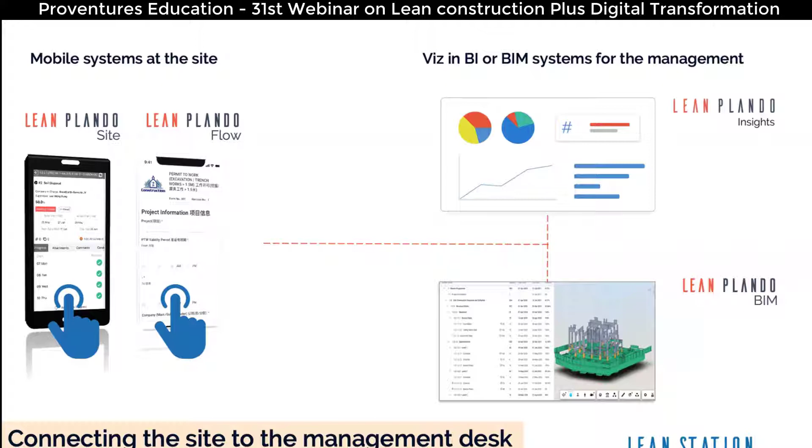So with a very simple slide, I just want to explain that simplifying from that to this is between connecting the site to the management desk. There are plenty of things that happen in between, but in a very simple way, it's a simple mobile-based application which is used by the contractors and subcontractors at the site. In between, yes, there are more complex project management systems and workflow systems which come in, but on the right, it comes in basically the visualization and the BI and the BIM-based systems.

So what are the benefits of this? I'm going to rush through these slides because I'm sure you're all waiting to look at the demo, but I just need to give you a bit of preparation for what you can expect. One is the visibility on the overall plan, which forms a very important aspect today, because you want to not just visualize the end result, but you want to visualize the process that is being implemented at the site, starting from design to all the production to safety to actual site production works.

And when you implement, you encounter challenges. Everybody knows this, we have delays and issues at different places. You want the key stakeholders to be notified at different stages. So this automatically happens between pre-construction, construction, and post-construction works. And then the monitoring of it, whether when the work gets completed, you want an analysis of whether it was done on time, and if it was not done on time, what were the issues. You need those things for monitoring, for contractual purposes, and for various things for learning to improve essentially.

And this essentially is, overall, you need to analyze. You need a system to analyze the various aspects of your processes, your design processes, your quality processes, your safety processes, your offsite production processes, even your contractual process, and then the production process at the site. Overall visibility on all these four areas.

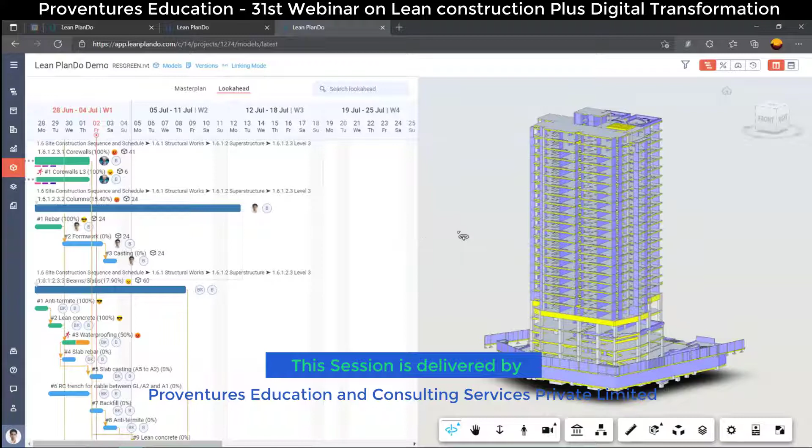This helps you in terms of visualization of your work, showing where are the things that we are supposed to be doing, and also in terms of the schedule. While planning out the works ahead, you can identify correctly which elements you are referring to for which task or set of tasks. Now visibility is heightened, and even those who don't have much understanding of or access to the schedule itself will be able to easily visualize how the planning is going to be done.

Now, because you have the planning data coming into your BIM model, you can also visualize your project status and progress through the BIM model. As you can see here, our basement is completed, level 3 is being constructed, and the rest of the levels have not been started yet. This is a real-time visualization of the project progress.

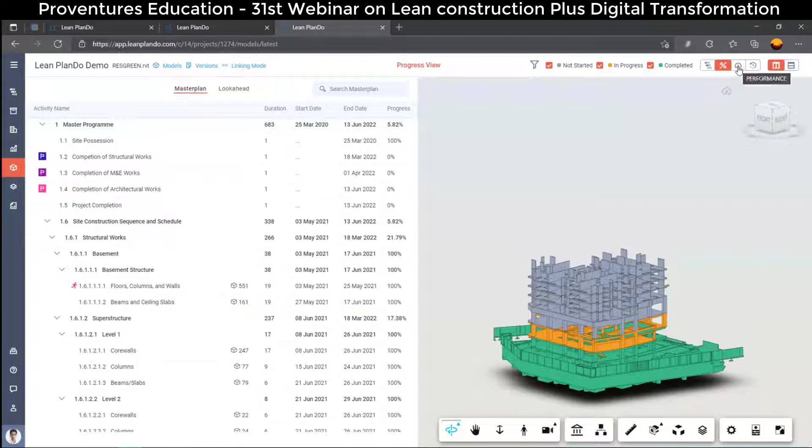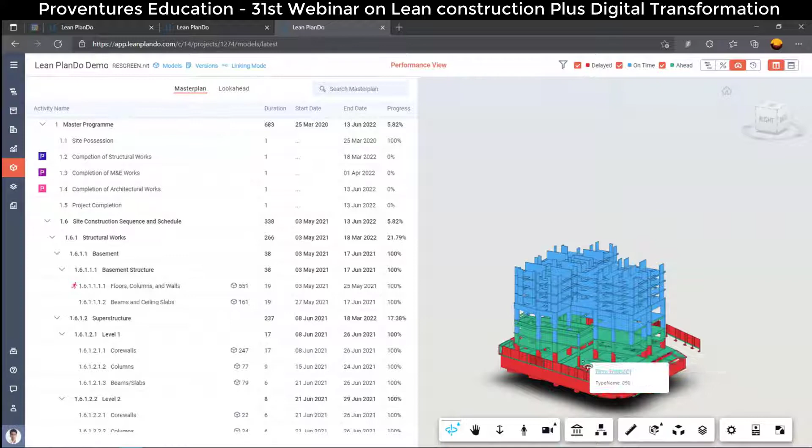Because we have a schedule, you will also be able to analyze where delays are happening, or where a delay happened. As you can see in the legend, our basement shows delay, it was constructed behind schedule, but level 1 was constructed ahead of time. So far, with our current plan, the rest of the levels will be constructed on time, and we want to keep it that way.

All right, so that is the end of our Lean PlanDo demo. I will now pass back to Srinivas and Sharath. Thank you so much.

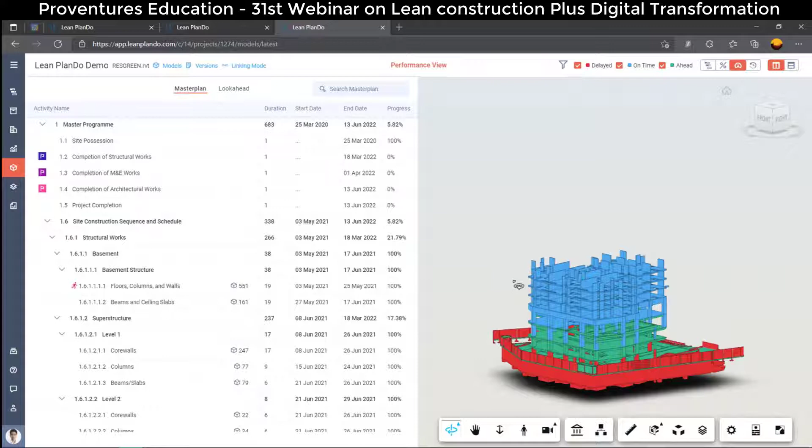Thank you, Klaus and Pius. Thank you, Sharath, for this. I think 20 minutes of demo is too little time to go through it, but just to give a kind of elevator pitch to the audience, maybe Sharath, would you like to debrief for a few minutes? Pius' voice was a bit slow, I don't know how many people were able to listen, but I think we were able to see it. So maybe if you would like to summarize in a few minutes some of the features we have seen, that will help them.

Absolutely. I think the whole system basically comprises a few things. The core is the planning and scheduling part, through which you control the project. Without it, having different other systems, there is nothing to centrally look at as a visible thing to control and manage the whole. This forms where the project manager, the planner, the site engineers, and the subcontractors are all integrated. Then there are various other systems, like your safety management system, safety workflows, and quality workflows, which are run by individual departments, but need to be working together serving the project. This system allows them to integrate, and the entire team comes together.